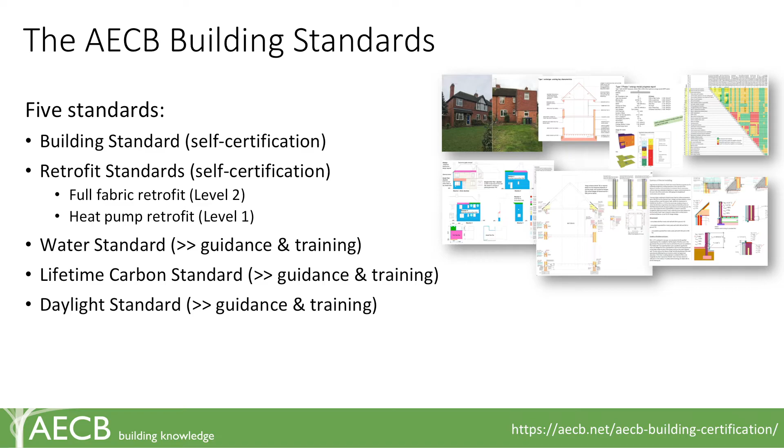So this new level 1 retrofit standard is based on the fact that we've challenged ourselves on the deep retrofit agenda. Deep retrofit is a very meaningful, useful thing to be doing, but it's not the only thing we should be doing. We clearly need to get off fossil fuels rapidly. Heating by electric heat pumps offers an easy and potentially cheap route when combined with relatively light fabric retrofit. So it's not an intrusive approach, which a deeper retrofit obviously is, and that's what we're struggling with.

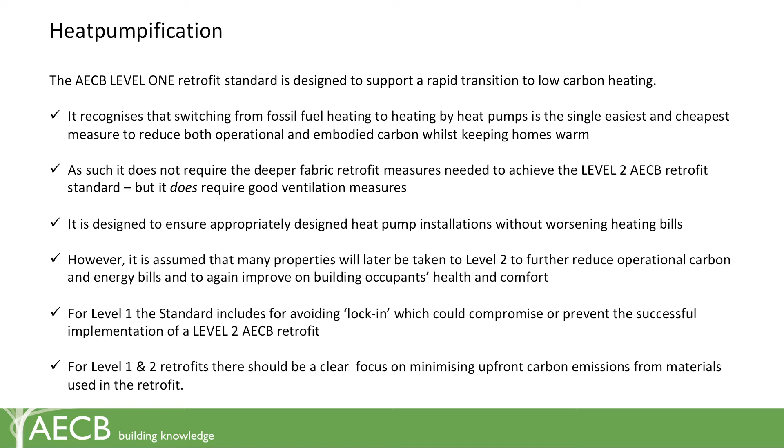We do require good ventilation to be installed as part of that, and obviously we have an eye on the running costs after the retrofit, so we're trying to pay a lot of attention to the reality of the performance gap and make sure that after such a level 1 retrofit, heating costs are not higher than the fossil fuel system you've come off, so we're doing some economic modelling on that.

We're not discounting going on to level 2, so level 1 is either a step towards a deeper retrofit, level 2, or those buildings at level 1 may well be sitting there operating on that level for 10, 20 years. And so we've been looking at what happens if we have two waves of retrofit, a level 1 and a level 2 over time, and I'll illustrate this in a minute. Is that still a meaningful thing to do?

Because one of the things we've been worried about in the past is people doing shallow retrofits which lock out future improvements. So the standard we've developed is designed to not block that second, deeper retrofit. So it's thinking ahead on a long-term plan.

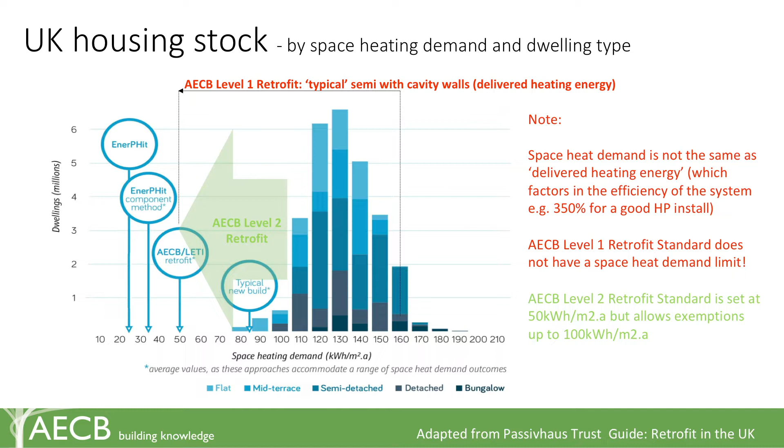So with the level 1 retrofit, there isn't a space heat demand target. What we're doing is making sure that there are just enough retrofit measures and ventilation measures to ensure a relatively healthy building, but we're using a well-installed heat pump system. We're using the very impressive efficiency of heat pumps to, in effect, reduce the heat demand through 350% efficient, well-installed heating systems.

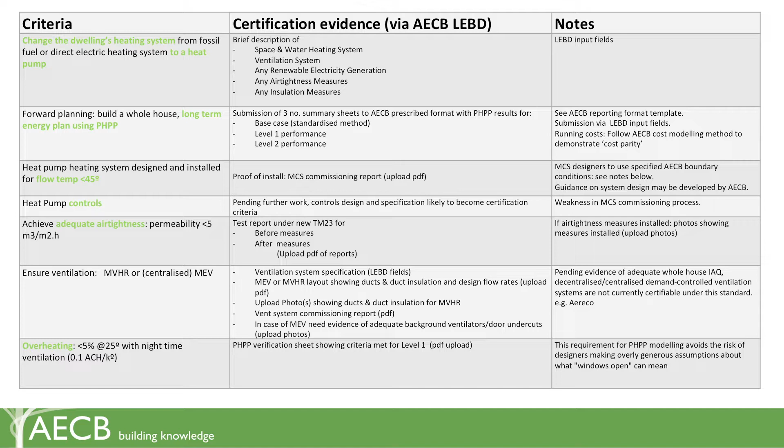We must have ventilation, so we're putting in sort of an additional requirement to show that you've put in adequate ventilation to maintain good air quality, and of course there's an overheating criteria.

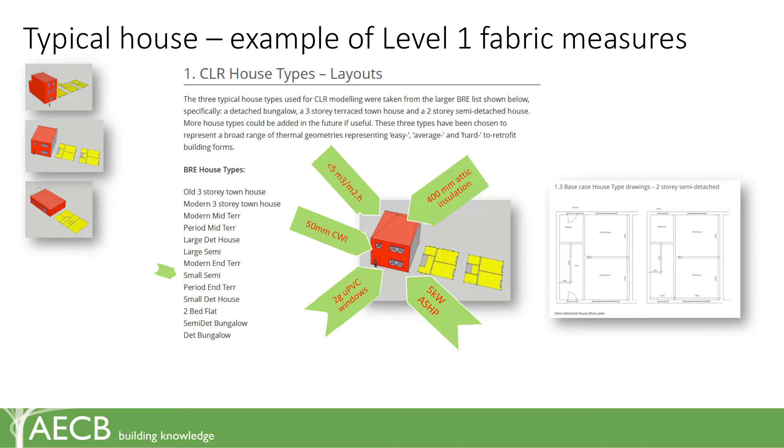Oh, with topping up attic insulation to around 400 millimeters, so that might require some attic top up. So you can see it's potentially a lightweight, sort of light retrofit. So we're not insulating floors there.

And so the key things we're looking for from the people who model using PHPP: you will get an increase in average internal temperature. You will be looking to make sure that the electricity running costs are no more than the gas or oil that you've come off, so you need to keep your eye on that.

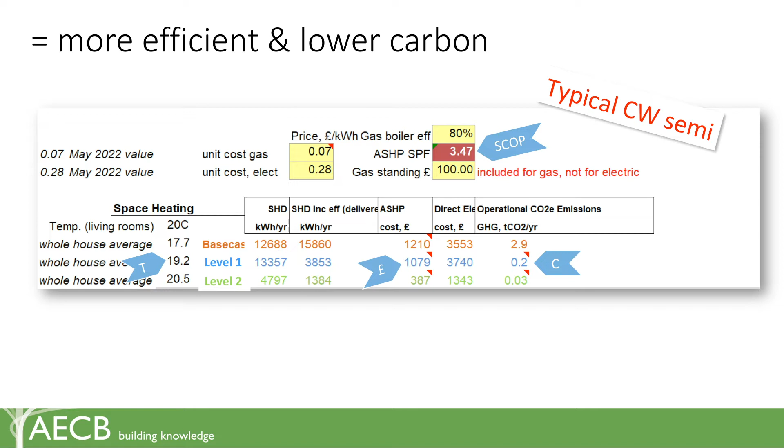And of course, we're looking at this very significant reduction in greenhouse gas emissions because you're going off gas onto electricity, the national grid is decarbonising, and these issues that we have been fretting about, how much electricity is going to be available to shunt 80% of homes from gas to electricity. Can the grid cope with that? Well, it won't be able to cope with that without increasing the capacity.

But at the moment, for the next 5, 10 years, we can get on with this. So there is an issue of peak heat demand, but we're not letting it get in the way of proposing we get on with this type of retrofit. We have to focus as well on resource efficiency. So we end up with this list of basic principles.

If we don't need to build, or we can find another way to satisfy the client's brief that doesn't involve building, don't build. That's a very sensible approach. If we do have to build, look for opportunities to retrofit first to satisfy the brief. If we do build or retrofit, don't make it too big. You know, that's sufficiency, modesty. That's quite hard to sell to clients, but we do have to be thinking about that.

Obvious things like making it adaptable, make the individual components last a long time. If we're using a lot of timber components, we don't want that coming back into the atmosphere sooner. It's later rather than sooner.

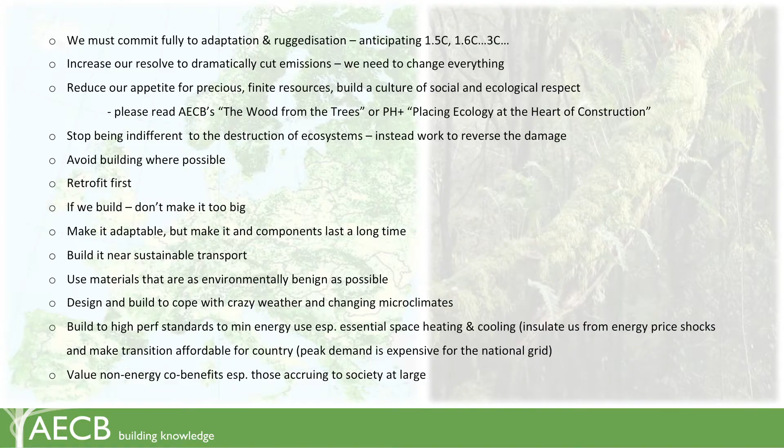I really want to encourage all of you who are not working to the AECB standards to just start working to the AECB standards and get them certified. It really gives a clarity, whether it's a passive house, EnerPHit, AECB new build, or the 2 retrofit standards. Working to a standard and self-certifying it on the system gives a real clarity. It also helps with clients. Once the client has agreed to work to a standard, it gives you a much stronger hand when they're making last-minute changes. It's basically, no, it's falling out of the standard.

In the last few years, having, I suppose, increasing confidence that as an industry we understand now how to crack the operational energy issue in new build and in retrofit and to quantify that accurately, we've moved on to embodied carbon. We're talking in terms of CO2 equivalent, which is of course the carbon dioxide and other greenhouse gases converted into an equivalent amount of climate damage, essentially.

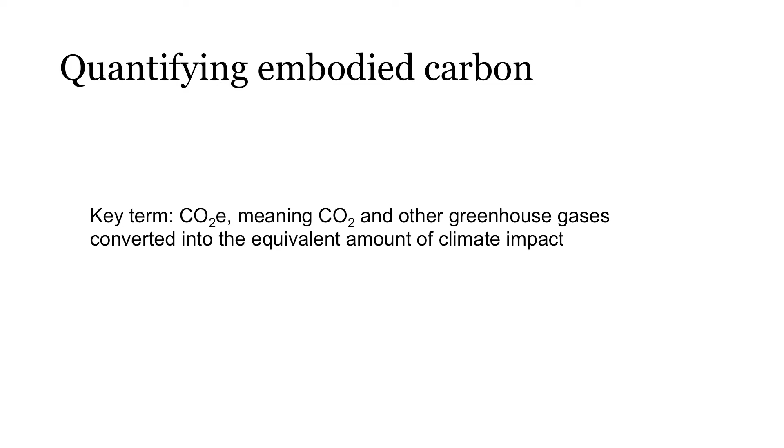One of the key things we need to look for, and these are really the building blocks for a life cycle assessment, are environmental product declarations. Now, they're not available for every material yet, but rather than just having a cert claiming that a product is green, what we have with an EPD is a standardized, independently verified audit of a product's overall environmental impacts. They're very challenging to obtain, depending on how complex the product is, I suppose. And they give you things now in a standardized way.

They give you values such as the kilograms of CO2 equivalent per square meter, that would be the functional unit, for instance, or per watt peak in the case of a solar PV array or whatever it may be. And there's increasingly stringent rules being laid down now, product characteristic rules, to enable you to fairly and consistently compare materials. So that's, I suppose, really important.

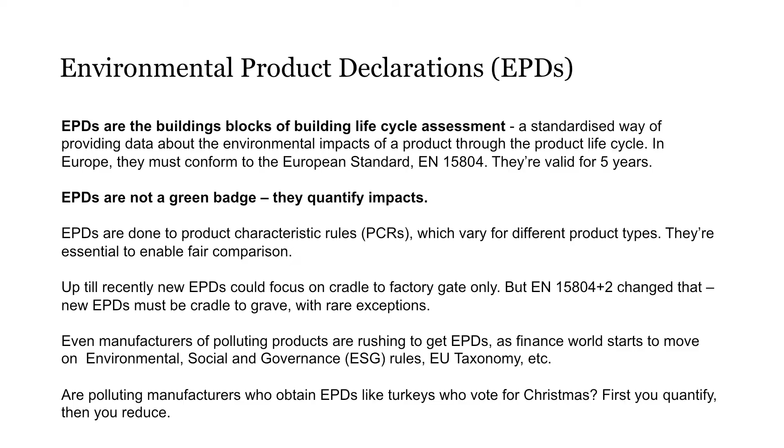There's been a really weird transition happening. I've noticed it in Ireland in particular, and it will be happening in the UK too. I've had conversations either directly with developers or with suppliers for big developers who all of a sudden are starting to move on life cycle assessment, on looking for environmental product declarations for products. It is amazing to see among developers in Ireland how quickly this is changing. I know companies who are under pressure from developers, heat pump suppliers, building fabric product suppliers of different kinds, who are under pressure to get EPDs just to be able to be involved in a project in the first place.

A few key documents, I mean, you can have the slides afterwards. RICS, their methodology has been really, really important. It's worth reading that. It's a big document, but it's worth reading. That's meant to be being updated, but that's been paused for now, I gather.

The scope is really, really important. So we were used to seeing at a stage architects coming forward with building LCAs where they present a mass timber building, for instance, and they'll just show you an embodied carbon score for the superstructure, and claim that it's a carbon negative building. You can't get away with that. The RICS document defines what the scope must include and then what's possible to include within it.

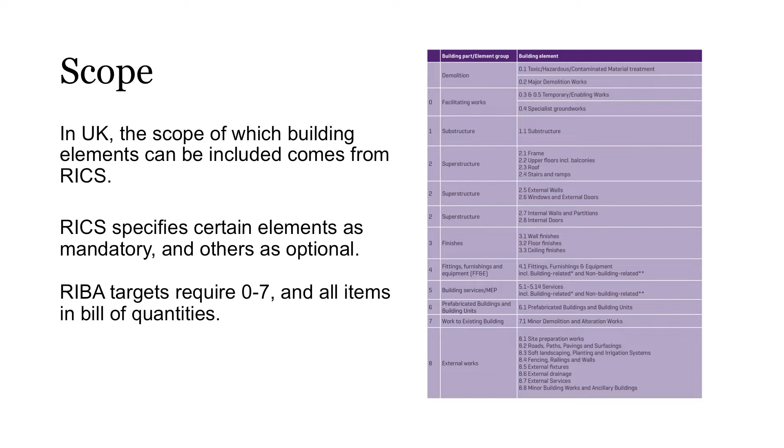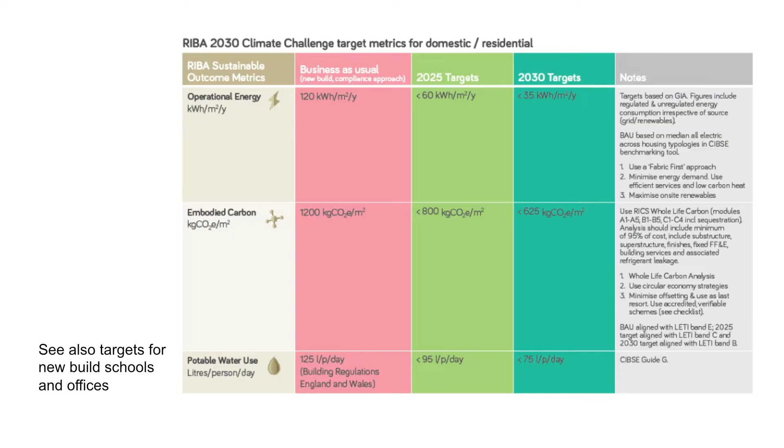RIBA, with their 2030 climate challenge, define what they require people to submit, and it's basically everything in this list, which goes through from facilitating works through to finishes, excluding external works and also demolition at the start of the project. There's assumptions in the RICS document about lifespan. The assumed reference study period is 60 years for different building types.

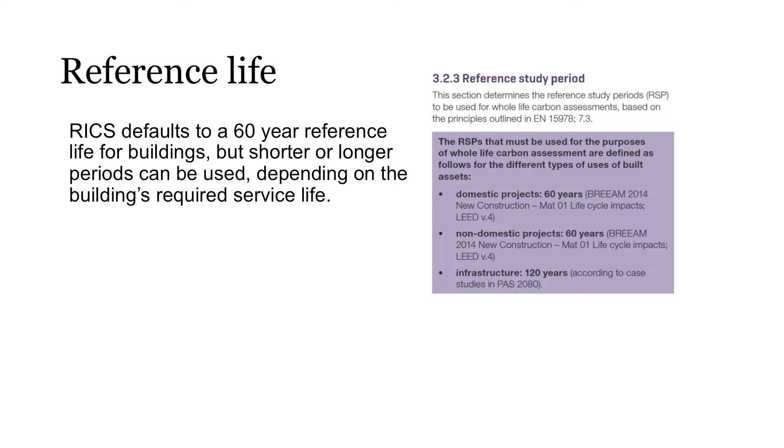Now, we have to hope that the buildings that we're designing now will last a lot longer than that. There is some data for non-domestic buildings in particular to show that the lifespan can be much shorter, often not because there's a problem with the building, construction quality-wise, but because of growth and densification requirements and so on. But that, we have to assume, will have to change in the kind of post-apocalyptic future that we're heading into.

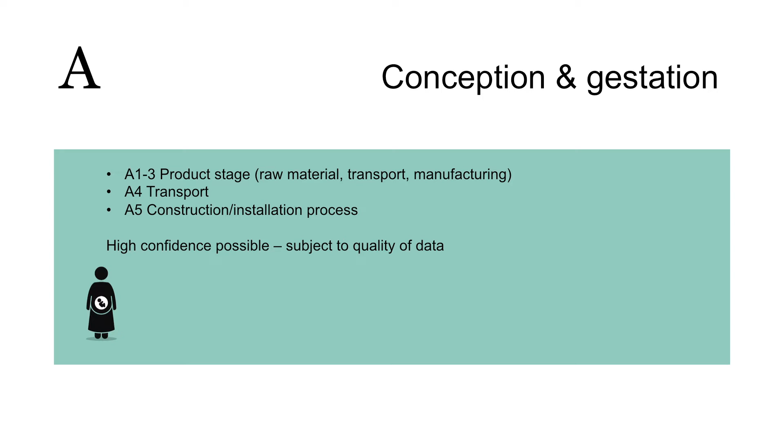Just to explain how this works in the context of building life cycle assessment. So the conception and gestation stage, this is the emissions involved in manufacturing the products, in transporting them to site, and in the construction and installation process. At this stage, we can have high confidence about the emissions because it's possible, especially if you've got EPDs, to get really good quality data on how much emissions have actually been released into the atmosphere, and also how much biogenic carbon is stored in components in the case of timber and timber-based products.

When you get into the life stage, which deals with emissions released or sequestered by materials during use, there's kind of a funny one here with concrete-based products. There's a process called carbonation, many of you will be familiar with. A lot of carbonation can be very problematic for concrete. If it's structural concrete, it can cause the concrete to fail, so you have to be careful about it. It can cause corrosion of rebar, for instance. But it's acceptable in certain uses.

Depending on the concrete product, you can actually get a fair amount of sequestration, depending on how dense it is. If it's very dense, for instance, and if it's buried in a wall and not exposed, you don't get as much. But I'm a bit wary of this because it can happen over long time spans, and the cement industry is inclined to try and claim probably more than it's really entitled to.

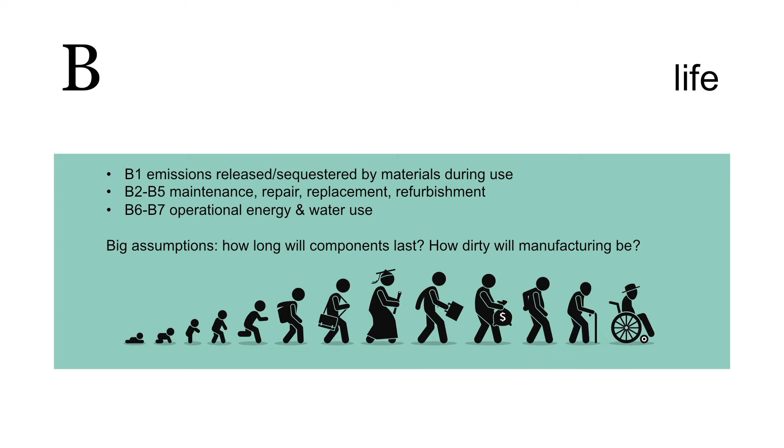B2 to B5 is maintenance, repair, replacement, and refurbishment. I should say B6 and B7, operational energy and water use, are excluded in the likes of the RIBA standard from their embodied carbon totals. They report on them separately. When you get into B, you start making big assumptions. How long will a component last? And how polluting will the manufacture of replacement components be? Well, we don't know. It's important to look at it, and to think about the quality of components and the quality of the work from a detailing perspective, the installation process and so on, to try and ensure that you get a longer lifespan.

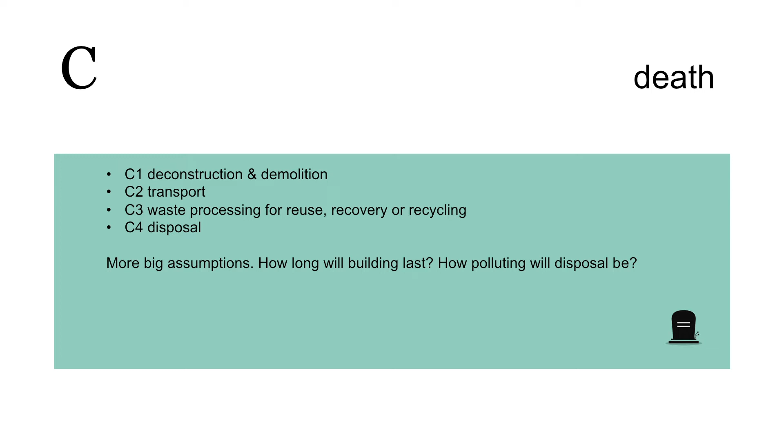Then in the death stage of the building, you've got deconstruction and demolition, transporting away materials, waste processing for reuse, recovery or recycling, and then disposal. More big assumptions are being made here. How long will the building last? How polluting will the disposal be? Timber suffers in this stage, actually, the way it's treated in the life cycle assessment methods, because you get all the benefit in the gestation stage of the stored CO2 from when the trees were growing. And of course, that isn't a license for just clear felling. There's nuance in all of this.

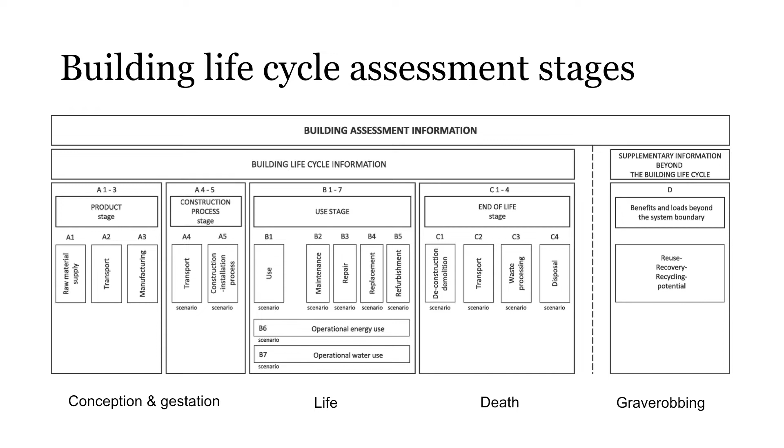But whatever you do with the timber, whether it's incinerated, landfilled, or recycled at the end, it's assumed to be released into the atmosphere, or rather it moves beyond the boundary conditions of the life cycle assessment if it's recovered. So the sequestration passes on to the next use. Now, what I mean by grave robbing is this kind of nightmarish concept of taking body parts and making a new entity out of it in the future, a new building, which is great, of course. Frankenstein monsters is I guess what we need in the future. But those benefits are not considered within the targets that we're looking at. So that's just how I would divide those tables up. That's my own twisted way of thinking anyway.

Look, get calculating so we can have these discussions. Pick apart calculations that other people are doing. Peer review is really important with this too. There's lots of tools available. One Click LCA have a good tool too, but my own preference from what I've seen would be PHribbon because it's Excel-based. You can reverse engineer the calculations and really pick them to pieces. And if you've got a building put into PHPP already, it really speeds up the whole process because you've got a lot of the heavy lifting already done in terms of the areas added.

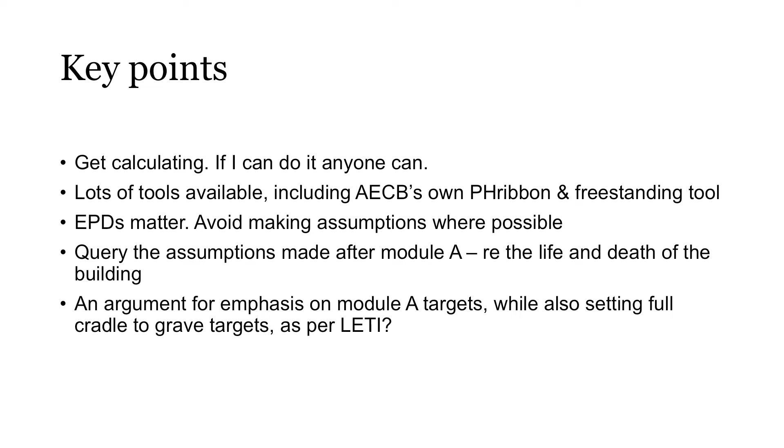EPDs really matter. Try and get them wherever you can. There's some areas where they're available, some where they're not. We've just seen a first EPD published, to my knowledge, globally for a heat recovery ventilation system, for instance. And they'll be slow coming for things like heat pumps, but they are coming. Query the assumptions made after Module A, after the gestation stage. If a building is someone's offspring, we don't know what they're going to do in the world. And I know it's morbid talking about the death of something that you're trying to create, but we do need to grapple with that.

And I think there is an argument for placing more emphasis, in the way that LETI have done, on Module A targets. Thinking about the full cradle to grave, but I think Module A, the gestation stage stuff, is the stuff that we can have most confidence about. And that's the stuff that we're putting into the environment now. So I think that's where a lot of our emphasis should lie, really.

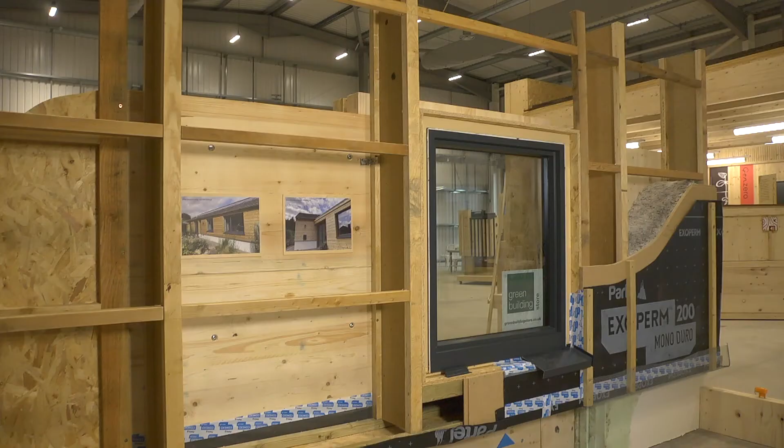The wall system that we worked through with Andy Simmons and with Tim Hulse was a novel approach to airtightness. So instead of a traditional two-membrane approach, the airtightness membrane is on the outside. So it required a building physics approach, some assessment and some analysis of the existing buildings. So we had an existing structure, which is a cavity wall build, and we wanted to assess and try to get an idea of what the airtightness was initially, and to find out at what point the airtightness would need to be improved to make this system work.

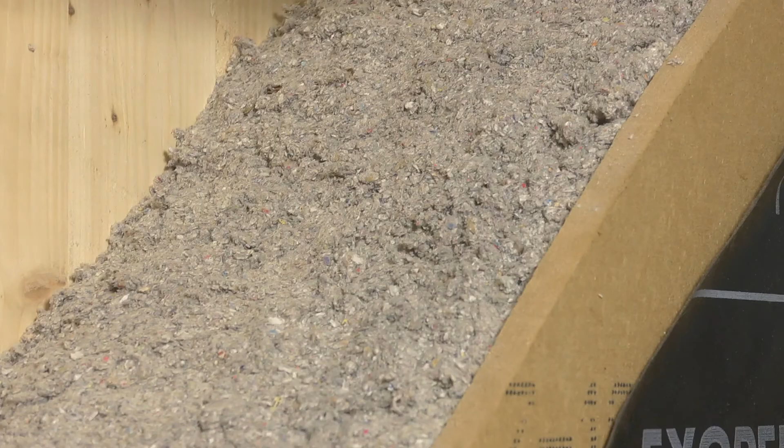So we assessed it and stressed it using WUFI, and we found that 5 air changes was a safe figure. So if you can bring the existing building to 5, essentially this system, be it a 200 mil I-beam or a 250 or 300, will work. So really what we're talking about is cellulose insulation under pressure. We've got this membrane here, which is a breathable racking board, if you like, as well. So that's vapor open, this is vapor open, so it always has the ability to dry to the exterior.

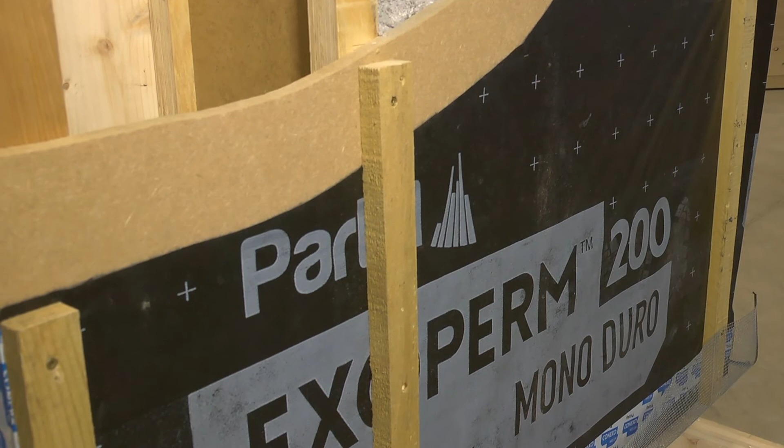In addition, I guess we've got some structural insulation used around windows and doors, that's the Almavert. Overall, the general idea is to have a super simple structure, a very simple idea. This is uncomplicated, it's readily available everywhere. Cellulose is the same with the membranes, and the skills needed to do it are readily available.

What we found really interesting was we installed some monitoring so we could check and validate that what actually happened over the 2 years post-install matched what we had analysed on WUFI. So a really solid outcome, and I feel like a validation that the system works as planned.

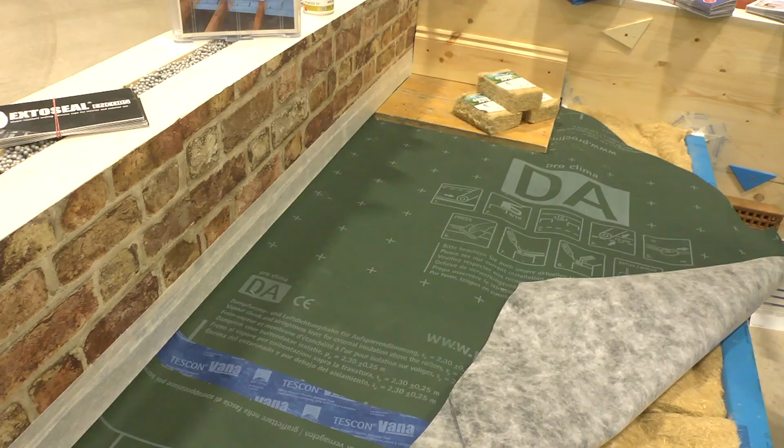What we're focusing on at the AECB conference this year is partial retrofit, because it's acknowledging that homeowners can't particularly do everything all at once, so it might be a staged process. So our model is focusing on suspended timber floors. As we all know, as we're sitting down in our little cottages or whatever, that's where the draft comes from, is under our feet. So eliminating that through a very strong system which absolutely encourages moisture management and a natural insulation system is key. So the whole basis of this system is that you have a wind-tight breather membrane.

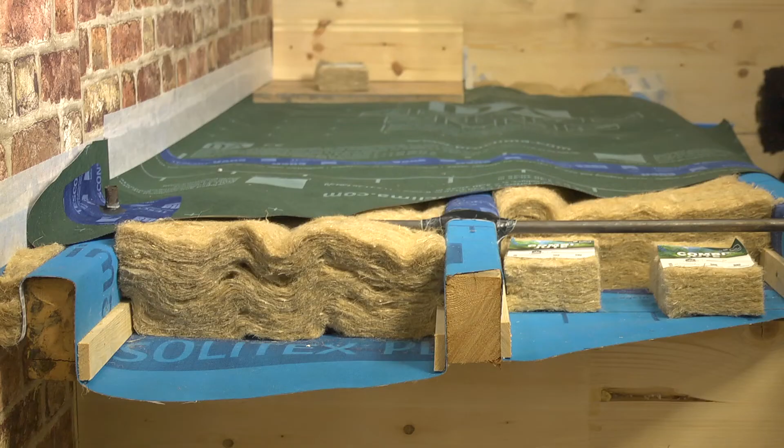So this is called Proclima Solitex Plus. It's moisture vapor open, and I always say that it's like a Gore-Tex jacket. So in other words, you don't sweat, but it's also wind-tight. It's a monolithic membrane. So it's stopping any air coming through, but it's allowing any moisture vapor to harmlessly diffuse out so you don't get any moisture buildup.

And then this top membrane is your airtight vapor control membrane. It's kind of retarding any moisture vapor transferring from inside to outside by diffusion. So you're not getting any buildup of condensation here.

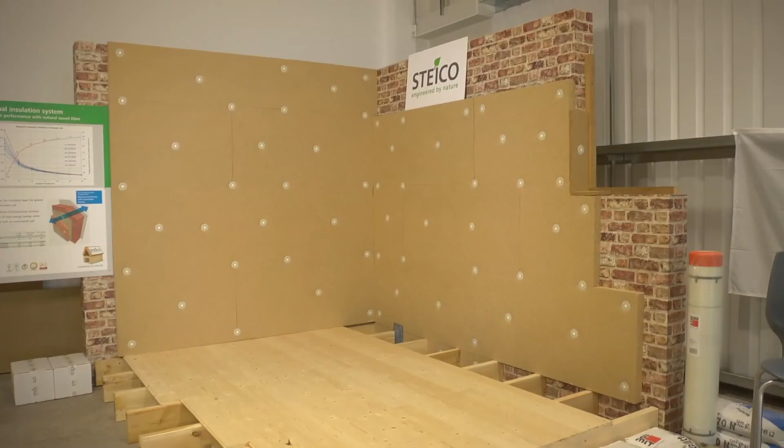Steico are a manufacturer of wood fibre insulation materials and I-joist structural timber products. We're promoting a system based on internal wall insulation with a wood fibre, and it's based on internally insulating existing masonry buildings, so existing solid masonry structures, of which there are millions in the UK that need insulating. Now, where people have traditionally been insulating existing solid walls, they've been using an insulated plasterboard approach. So it's typically plasterboard bonded to a PIR or an EPS type insulation and a dot and dab process on the wall.

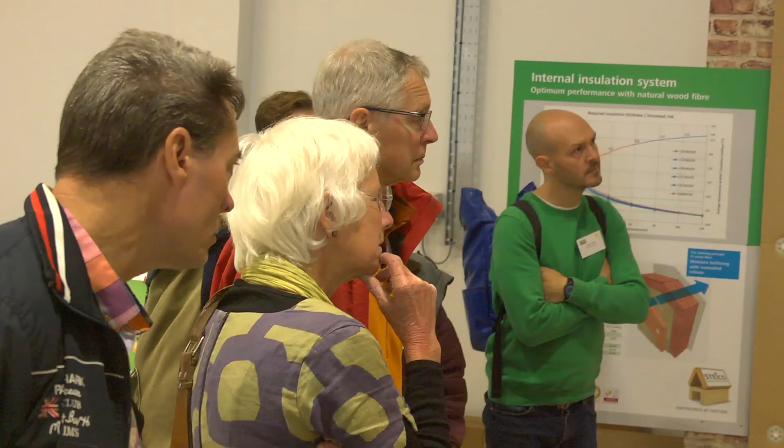What we've come to sort of see over time with people using that system is when you're installing that, you're creating a cavity between the existing wall and the insulation layer. Any warm air that gets through the insulating layer, hits the cold wall surface, will condense and you'll produce liquid water. That liquid water will run down in the cavity and it will produce mold and damp problems. And that is occurring in a lot of buildings.

I think there's so many ways you can overcomplicate, particularly retrofit situations, and it can become very difficult, very complicated, very expensive. And actually, if you've got a building that's relatively difficult to deal with, a thin layer of internal insulation is actually the easiest way and the cheapest way to go forward.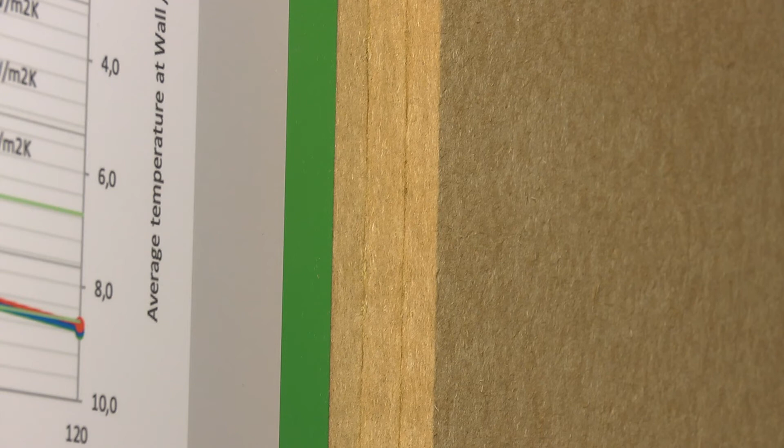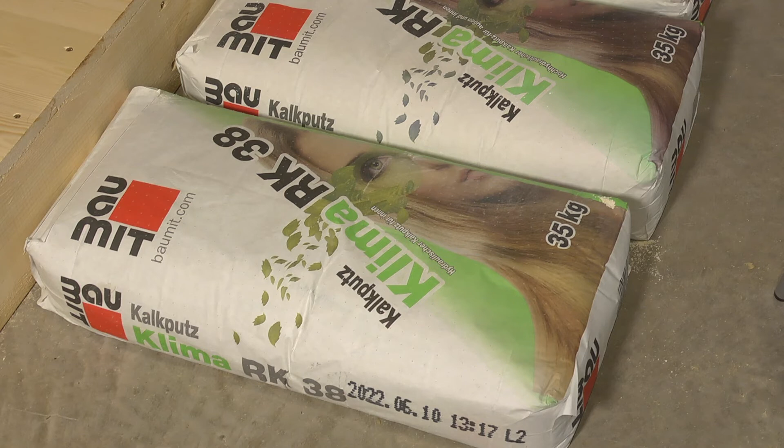What we do with a natural insulation is that we bond the wood fibre board to the existing wall. So we have got between the existing wall and the insulation around about 8 to 10 mil of, depending on what insulation manufacturer you're using or what lime or clay system you're using, a bonding coat between the two. That bonding coat is an integral part of the system because it ensures there's no air gaps between the insulation and the existing wall. So it's impossible for liquid water to form and run down the cold wall surface.

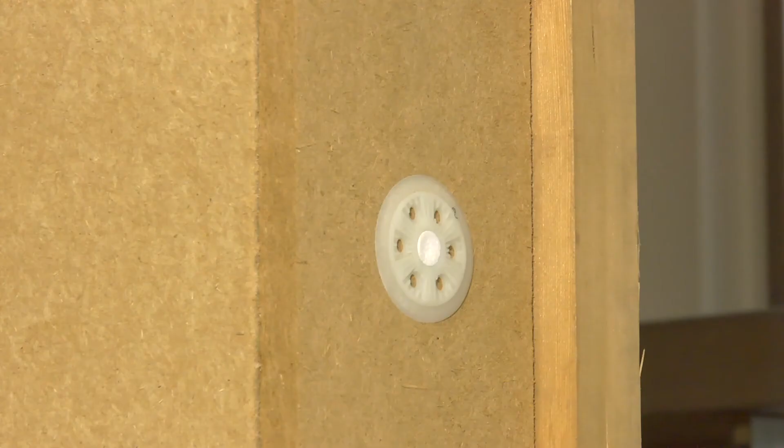Any moisture or condensation that gets created, because you're using a wood fibre approach, is stored within the fabric of the insulation itself. The product can hold around about 20% of moisture by volume, and it can naturally allow it to evaporate either to the outside or back to the inside. It's what is traditionally talked of as a breathable wall solution, which in turn ensures that the internal environment has low humidity, so it's a healthy internal air climate.

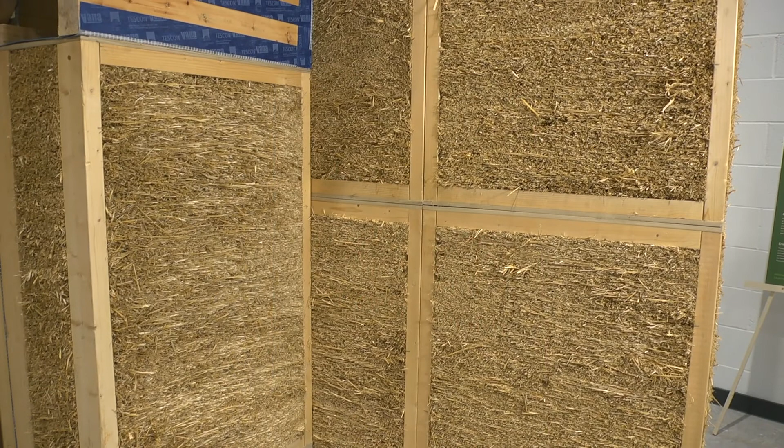So, welcome everybody. I'm here to tell you about the EcoCocon straw panels. It's a very, very simple panel. It is exactly what you can see. It's 4 pieces of timber at the corners of the panel, timber at the top and at the bottom, and then plywood. And it's screwed together with screws with big heads on. That's it. It's 98% natural timber and straw, most of it straw.

The timber's all FSC certified. The straw is tested for pesticides and fertilisers before it's used, and there are never any residues. And the straw is compressed to a density of 110 kilograms per cubic metre, which is the same density that we get in a normal load-bearing straw house. And at that density, you can hear that's the thud of a dense straw. At that density, then you get the optimum insulation value and you get the best fire protection.

So there is not enough air in here to burn, and all the fire tests prove it. And there is enough air to give good insulation. So you've got the combination of fire protection and really good insulation. And insulation does more than one thing. It doesn't just give you a U value. And that's the message we're trying to get out with all of the natural insulations, is it's also a breathable system. So the natural fibres deal with moisture. You don't get interstitial condensation in these panels. It just does not happen.

And the way that you put them together, the panels can be anything from 400 mil wide to 1.2 metres wide, and they can be anything from 400 mil high to 3 metres. But obviously you want to go more than 3 metres to build something taller, and we just put them on top of each other. They're just like giant building blocks. You've all done it as kids. You just put them together and you can get millimetre accuracy. So it's all about modular building systems. It's all about planning and logistics and getting that right.

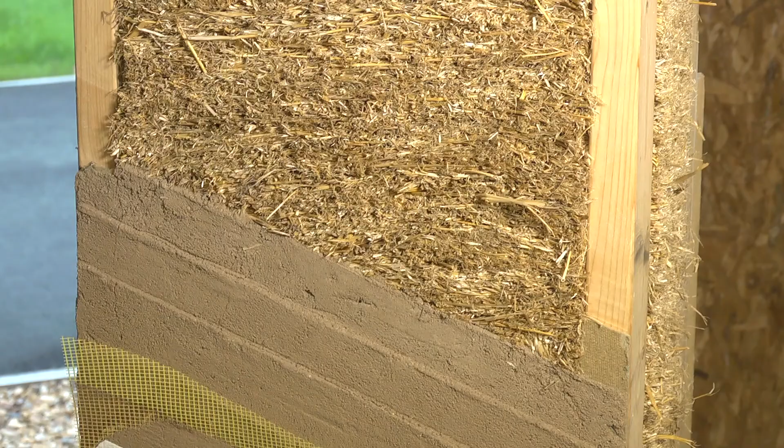So it all comes on a big articulated truck and you offload it according to how you want to build the system. So on the inside, we would recommend using a wet clay plaster. On the outside, if you're wanting to achieve passive house, then you'll need to use a membrane. So the outside skin is the airtight layer. So when you build them each day, you put your membrane around, which also gives you weather protection.

You cover over your windows and doors, and you fasten the membrane on with 5 mil plywood pieces, which in themselves are another protection for airtightness, which cover the joins between the timbers. These are all supplied as part of the package. And then onto that you put, if you want to achieve the passive house standard, 60 millimetres of wood fibre board. So this is a certified product. It will already go through the passive house system if you follow these details.

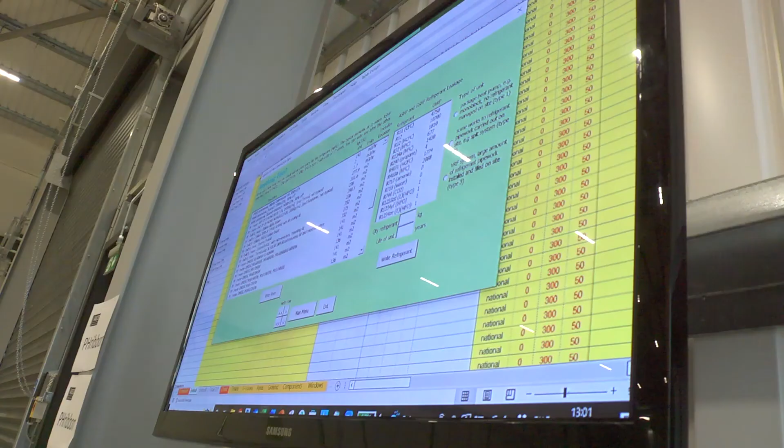We've had a really good day at the AECB conference, so really good attendance, engaged people, and I suppose very ecologically minded but practical as well. AECB is a group that is committed to basically have an impact on reducing both carbon, energy and the change that is needed in the UK. If we want to upskill and reskill our future workforce, we need to work with the industry, we need to work with future and current professionals, and we also need to work with academia. So to me it seemed a natural role to bring everybody together, which is what I love doing.

Well, coming to the conference is a must. It's rare, especially over the last few years, to have so many people come together and share knowledge.